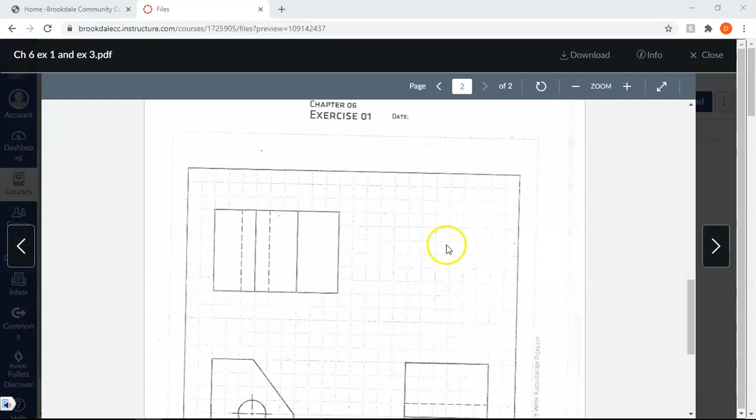We are given the orthographic views of this, meaning we are given the front, the top, and the side view. Your direction is to create the 3D part in Inventor and then create the drawing file to properly dimension it. As a side note, the grid spacing on the bottom is 0.2 inches, meaning that each one of these is 0.2 inches.

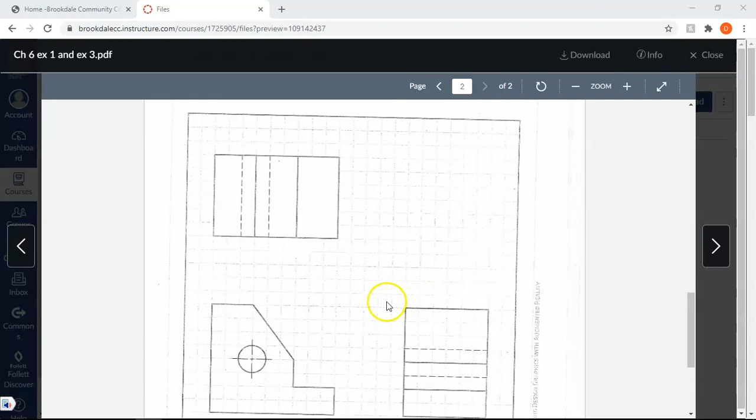For simplicity's sake, let's just say that each grid is 1 inch. This is the front view right here, which is a good place to start by drawing it. I'm going to draw as my sketch 1 this shape right here, and then I'm going to extrude it the depth involved, which is going to be shown from either the top view or the side view. Either way, the depth extrusion is going to be 6 units.

So we can do a little bit of counting beforehand. We go up 1, 2, 3, 4, 5, 6, up 8, over 3, over 9, up 2, and 3, up 2. We'll see if we can remember that as we draw it.

So we're going to come over here, do a new English part, start a sketch. I'm also using Inventor 2018. It's 99.9% the same as 2020. If for some reason you have an issue finding the button that I use on your version, let me know and I can let you know where you can find it.

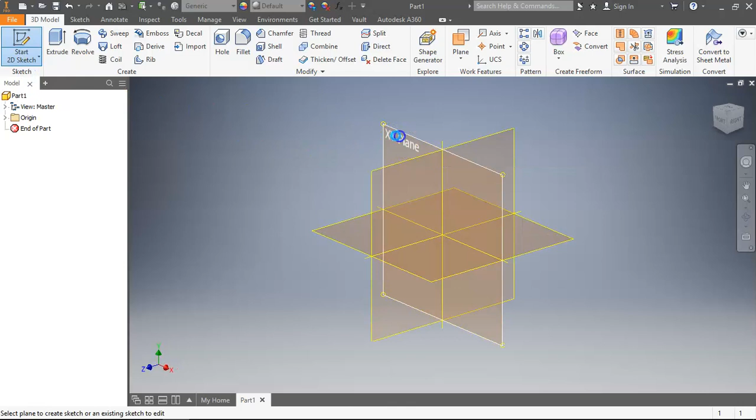So we're going to start a 2D sketch. I like to do the XY plane. I'm going to start at the origin, make sure that the green dot is there. You can zoom out a bit and then hit the middle scroll wheel to pan. It's good to kind of be able to see the line in its entirety. Now it's a little bit too far out.

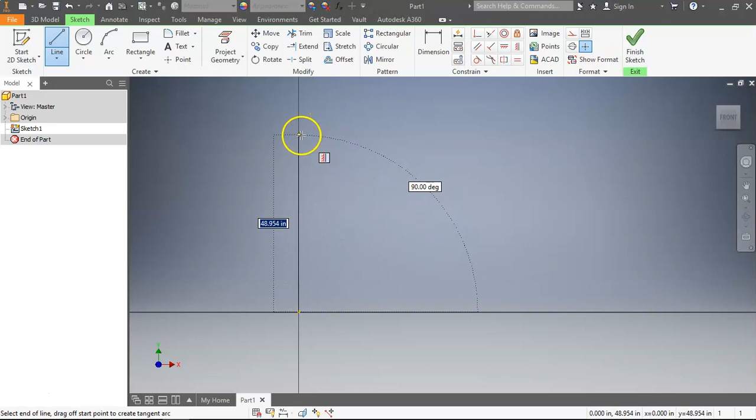You're going to have your first one be 8 going up, and then you're going to move over 3. And you're going down kind of an unknown amount, right? So you can either just draw it somewhat in and add dimensions later, or you can hit escape, go back into the line command, and then start going in the other direction. So that's 9 in this direction, always making sure that you are perfectly vertical and perfectly horizontal.

The way you can check is as I get close to the line, you'll see me click on it, and then you'll have that little constraint bar show up, showing you that it's perfectly 0 degrees, perfectly on the x-axis, perfectly horizontal. I'm going to say 9, enter, up 2, over 3, up 2, and then I could connect the dots. I can hit escape now, and notice how when you hit escape, you'll get out of the line command.

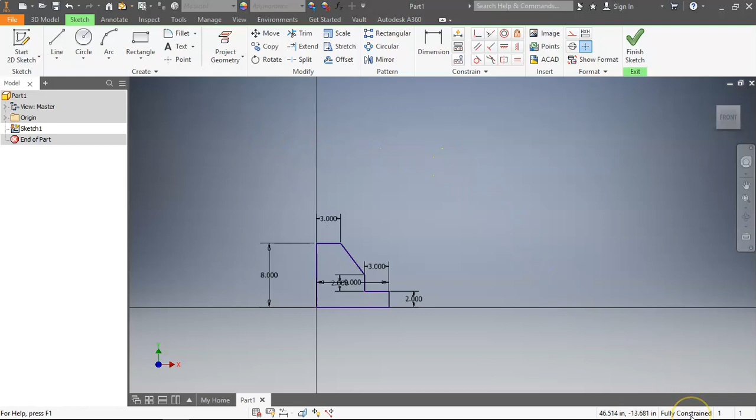Okay, so we are fully constrained. That is a good way to kind of spot check yourself.

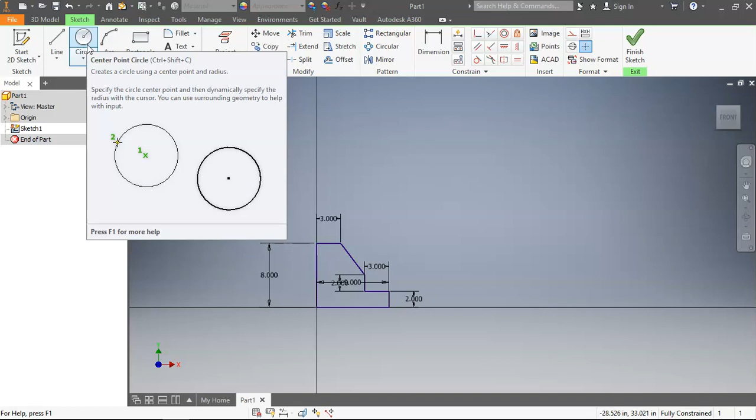And now I'm going to add a circle. Circles require 3 dimensions in order to be able to locate and describe the circle. You need 3 dimensions for each circle. The first dimension tells you the diameter, and the next 2 dimensions locate it both horizontally and vertically. I'm going to just put a circle, and I'm not going to specify the dimension yet to prove a point. I'm going to put it out here and hit escape, and look, 3 dimensions needed. So we went from fully constrained to needing 3 dimensions because each circle requires 3 dimensions to properly describe it.

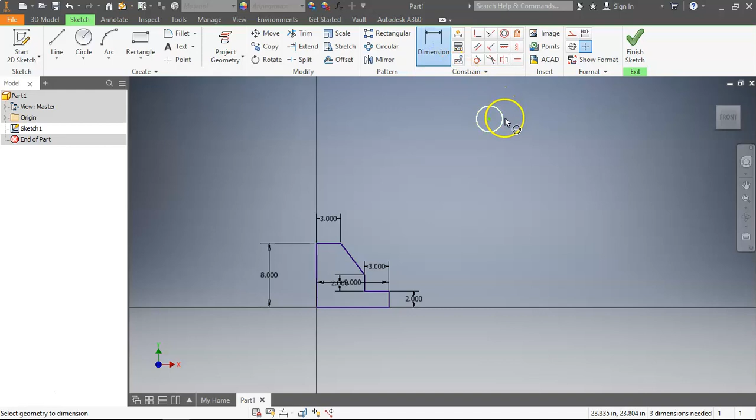I'm going to hit dimension, and I'm going to click on the circumference of it, pull it out, and tell you I want this to be a diameter of 2. Boom. Now we have 2 dimensions needed.

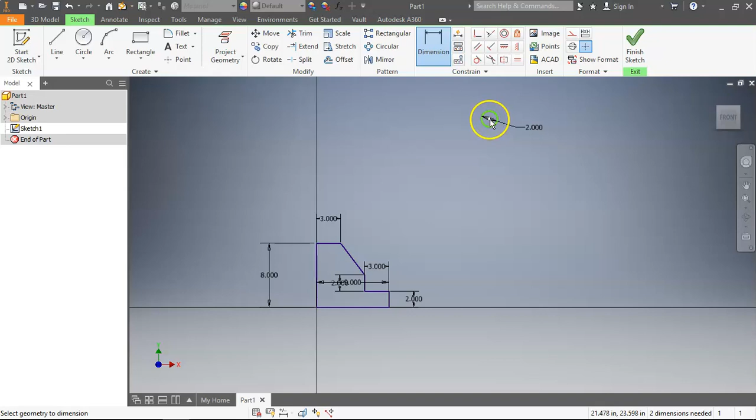And now I'm going to click on it, and I'm going to locate this circle via the center point. So I'm going to say center to the origin, and then you can either do a vertical or a horizontal dimension. You're going to have to do both, so it does not matter the order. We'll do a vertical first. I want the vertical dimension between the origin and the center of this circle to be, what is that? 1, 2, 3, 4. To be 4 units.

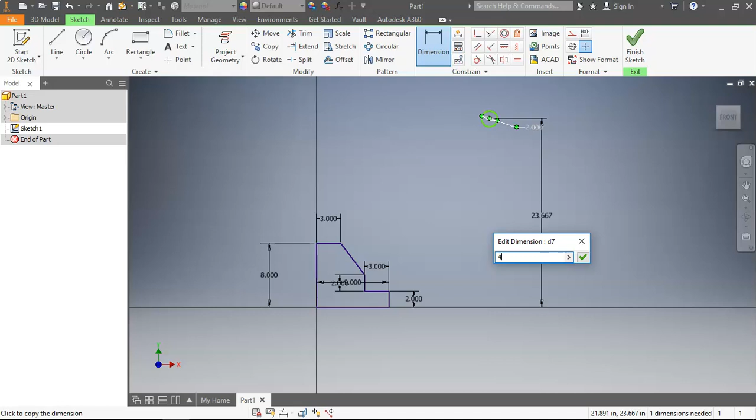And now it's on the right vertical plane, but not the right horizontal. So you're going to have to do the same thing again, dimension, click the origin.

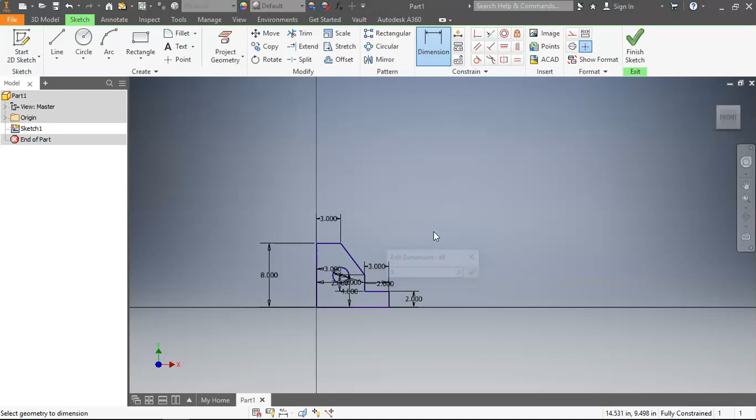Make sure you're getting the origin, right? I guess sometimes these lines will work, but I think it's good practice to use the origin. Now the horizontal distance is going to be 3, and now we can see we are fully constrained.

You can finish the sketch, extrude it. It might not give you a preview because it doesn't know which closed geometric shape it wants to extrude. So just click right here and specify you want to extrude it 6 units.

And that's it for this drawing—well, this part drawing, I should say. This is one way of drawing this part. There are easily a dozen ways you could have approached it using different sketches, different orientations. As long as it's a somewhat efficient drawing and you get the same finished product in the end, then you meet the requirements. You don't necessarily have to do it the way I did, or in the most efficient way, as long as you have a finished product.

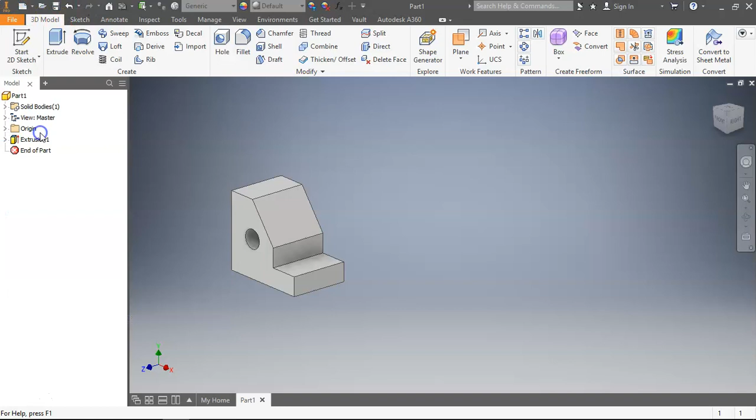That is good. So now we're going to have to save it, because in order to do a drawing file, we need to have a part file that we can reference into it. So I'm just going to save this on my desktop.

Or actually, I have a folder for Brookdale Community College, and we'll call this week—which week are we in? I forget. 3, or maybe it was 2. No, I think it's 3.

And this is chapter 6, exercise 1. And it's gonna really help to have it be organized, or else you could save it in the wrong spot, and then you have what they call unresolved links, where it's trying to pull a file that's not saved in where it was previously, and then you might lose some work.

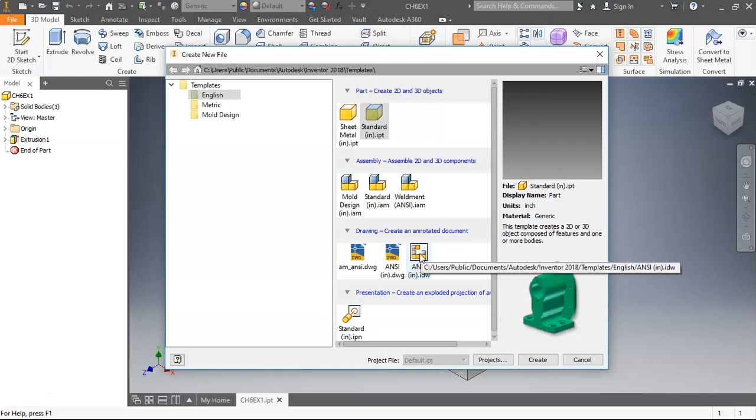So now that we have the part file saved, we are ready to create a drawing file. So we're going to go back to New, Drawing, ANSI, which is American National Standards Institute, something like that. IDW, Inventor Drawing.

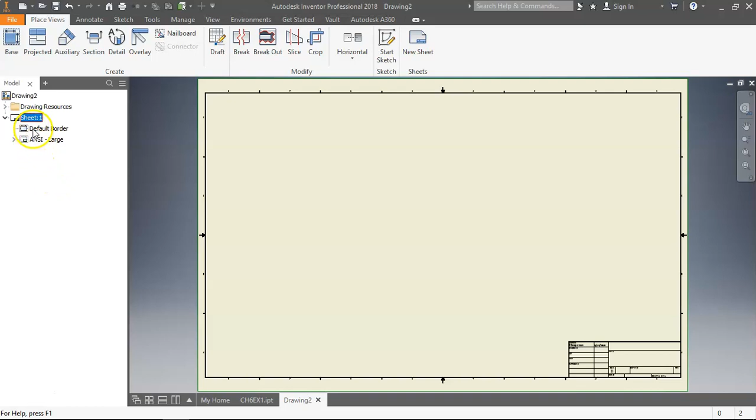We need to then, for every one of these, adjust the sheet specifications. The default is a 22 by 34 inch sheet, which is very large. For this class, we want it to be an 8.5 by 11. So you're going to right-click Sheet 1, edit the sheet, and make it a size A, not a size D. 8.5 by 11, okay. It makes the title block huge.

Let's delete the title block. And then we're going to go to Drawing Resources, Title Blocks, and ANSI A is a smaller one. Let's insert that. Right-click it, and then hit Insert.

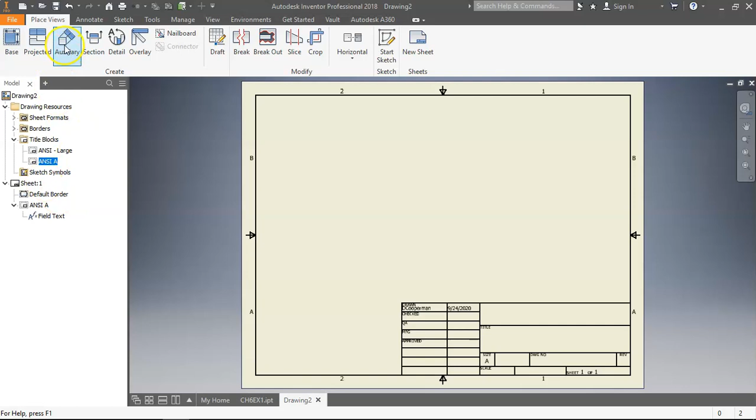Now we are ready to import our part file. So under Place Views, you're going to hit Base. Inventor says, okay, he probably wants this part because that was the other drawing I have, or the other part I have open, and it's the one I saved most recently.

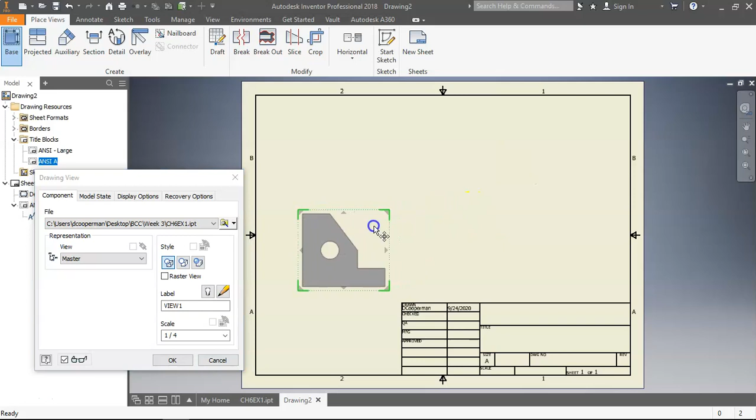If for whatever reason it did not give you that one, you can just as easily go to Open an Existing File and find wherever you saved it. So let's go from the top. Base, I'm going to move this over by clicking in the green area, and then before I click anything else, I'm going to move my mouse up.

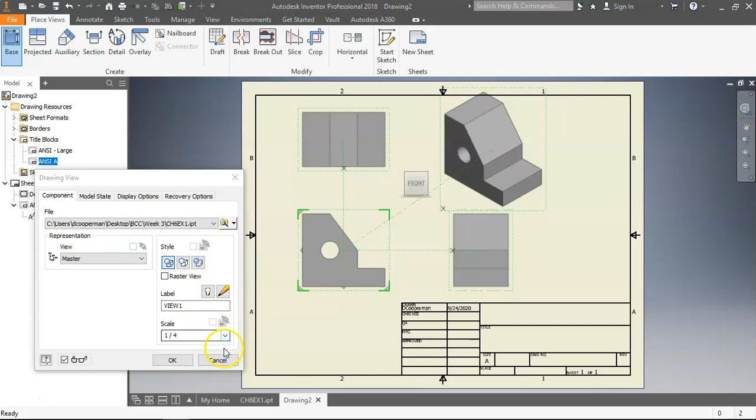And look, I could just as easily place my top and my right view. You can even, if you wanted, put in isometric as well. And then you can hit OK, or you can adjust a few settings. Hidden line should be on. Hidden line removed for whatever reason if you wanted that. And then shaded also gives you some color. You can also adjust the scale as well, and you can hit OK.

If you wanted to delete this, you can click on it and hit delete. I'll show you something else as well while we're here. Say you only included the base view, and then you want to include the top or side view later, you can go to Projected, and then look in the bottom left.

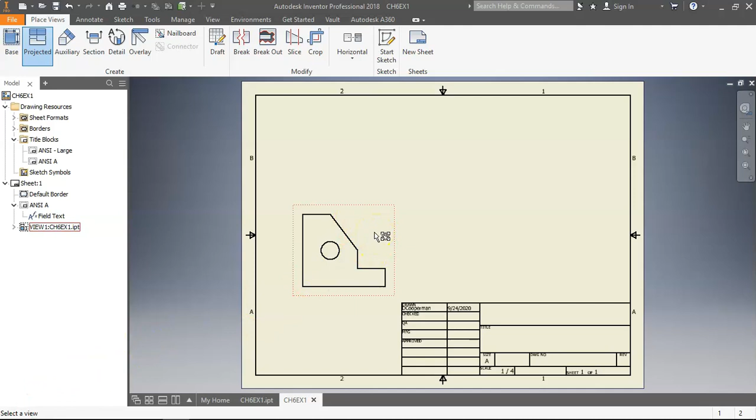In the bottom left is Inventor telling you what it wants from you. So if I want to do Projected, but I need to kind of learn the steps in order to do that, you can do, okay, select a view. Well, I want to project this view. Select. Select view location. Okay, I want to locate it right here. Select view location or choose create.

Well, I want to do another view location. Now I want to create it. So I have to do the right-click menu, create. And now it's good.

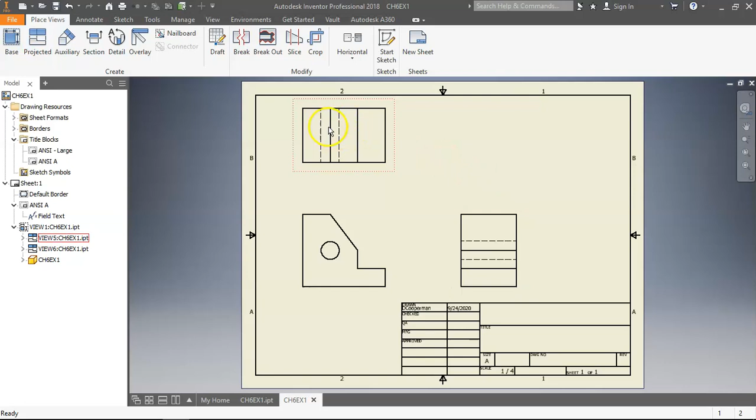Notice how this automatically includes all my object lines and all my hidden lines. Hidden lines, of course, are represented by dashed lines.

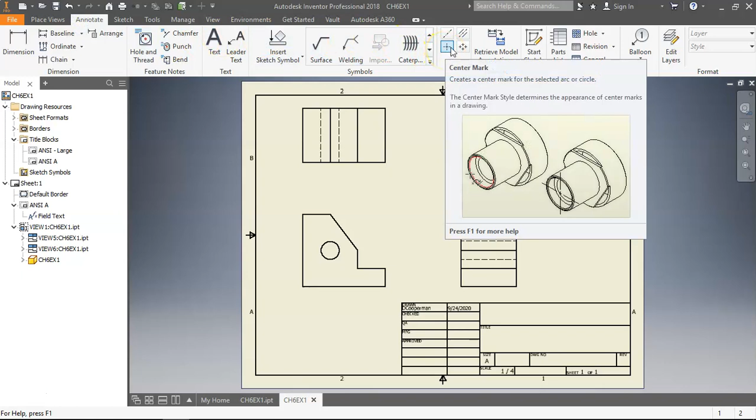Next, you are going to want to include center marks and center lines. So you're going to go to Annotate. Center marks are like the little crosshairs, a target or a scope. You just click that, then click the circle, and it automatically appears.

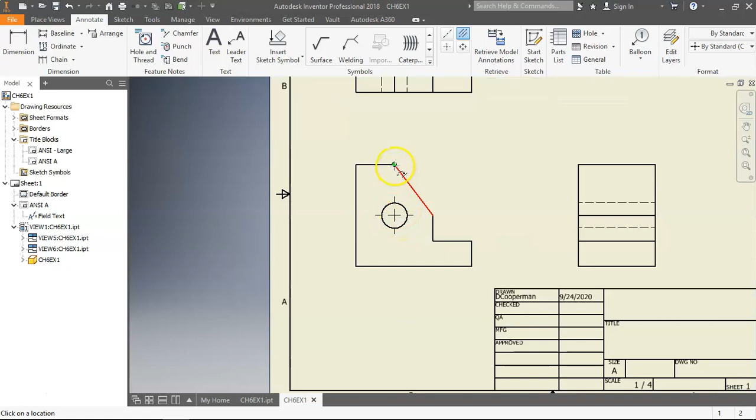For center lines, you're going to click center line bisector. But notice something: the center line of this hole occurs at the same location as an object line. The halfway point between these two hidden lines is right here. Order of operations states that if I have an object line and a center line at the same instance, I'm going to show the object line instead. So I'm not actually going to add a center line here, and the same for here.

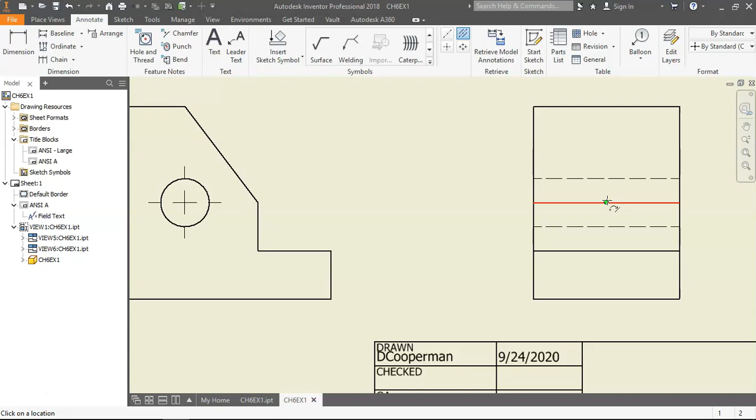If the circle was moved over, let me just show you. Now this is just a hypothetical, don't get confused, don't change yours. Let's say this was moved over, for example. Let me move it a little bit so it's not directly on the edge. So, 1.25.

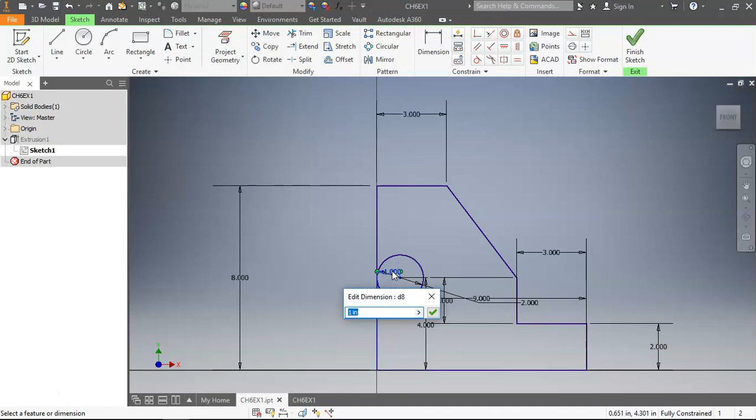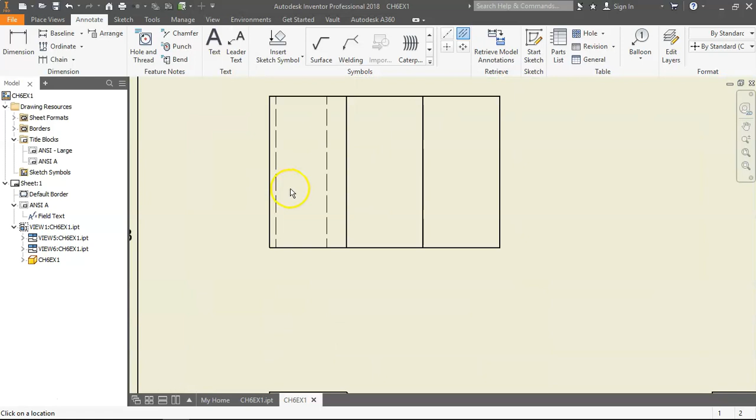Notice how it changes automatically over here. Now I would require a center line over here, since this hole is actually a circle. So you're going to hit center line bisector. If you don't know how to use it, look on the bottom left. Click on a location — the center line is going to be between what two lines? Here, click, and here, click. Boom, it automatically populates. Of course, I don't want that, so let's go back and undo some of the changes we made.

And we will resume. We have the center mark and no center lines, because the center line occurs where a hidden line appears.

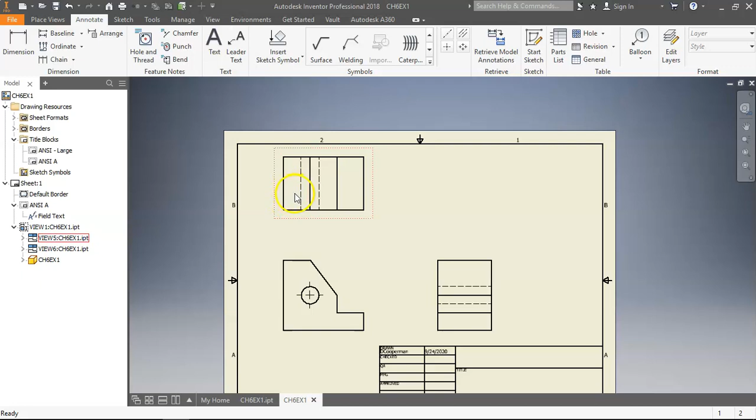Okay, now we are ready for some dimensions. We went over all the rules for dimensioning last class, and there are a bunch of them, so you've got to try your best to remember them. Sometimes you have to break one rule to make the object look better, or to avoid violating another rule. But at the end of the day, you want a part that's properly dimensioned and looks good and neat. So I'm going to do dimension and start dimensioning things.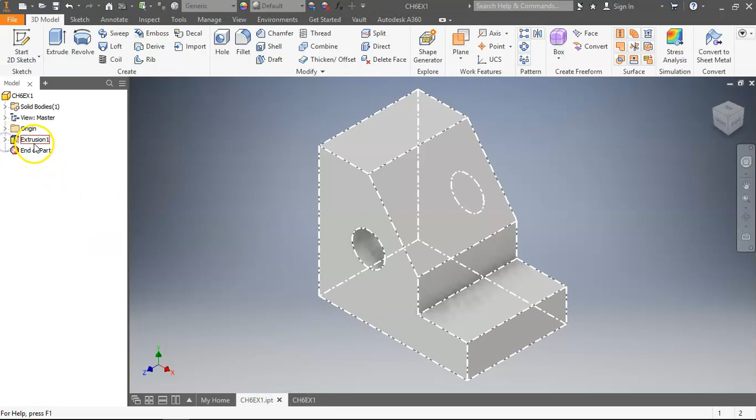If you go back to your sketch, let's edit the sketch for a second. You can either edit the sketch by right-clicking and going to edit sketch, or you could expand this to find your Sketch 1 and do it there. Here are all your dimensions.

So I have a 2 right here, a 4 right here, and an 8. Those are all my height dimensions. So we can go ahead.

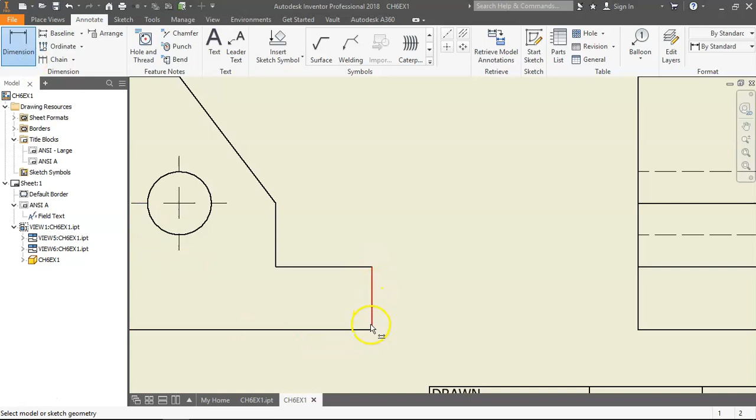Now to dimension, you can either click on the line when it's red, or click when it's a green dot, and that gives you point A to point B. You will most definitely be using both. Let's do this, and then you also want to dimension this line.

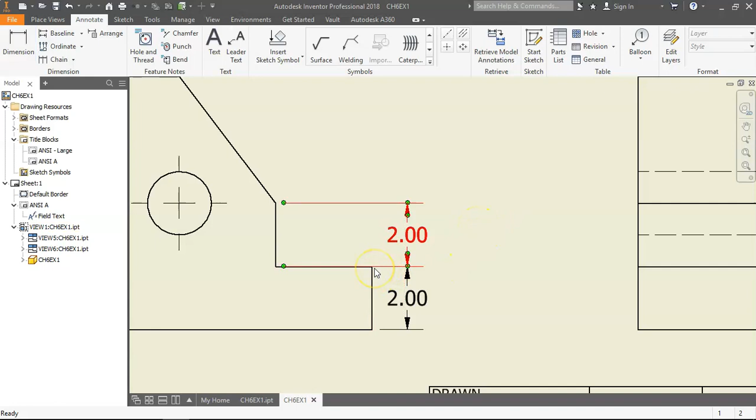Now, if I just click on it, that looks pretty good, right? It's actually a mistake right here. Remember, you always want to have a gap between the point you are dimensioning so it doesn't get confused with the object line. So I'm going to delete that last one and show you what you should have done.

Remember, last time I did this, I clicked on the line, and that was bad. This time, I'm going to choose point A right here, and point B not here, but rather here, because that gives me the vertical distance in between — but by choosing this point, the gap will now be visible. Boom.

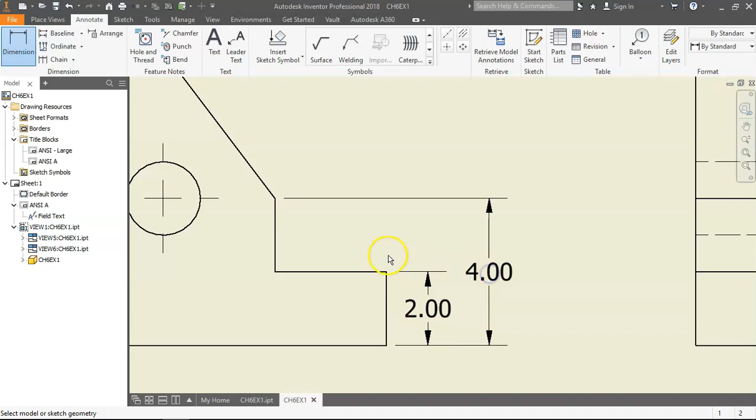Another thing you could have done — this is perfectly valid too — is go from here to here. We talked in class about baseline views versus chain views. This would be a baseline view, and the previous one would be a chain view. Both are perfectly valid.

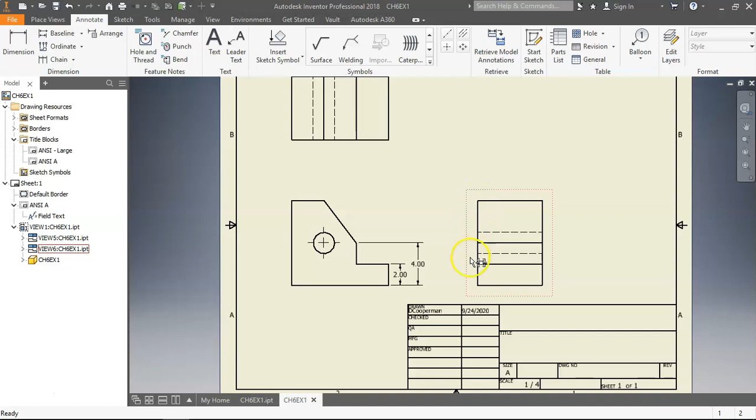For the overall height, you might be tempted to do this, but one of the rules says you should always keep the dimensions between the views whenever possible. You could go from here to here, or it's equally valid to go — notice how you can't even do the line — from here to here. Either way does not matter; both would be valid. I like to do as many dimensions as I possibly can on my front view.

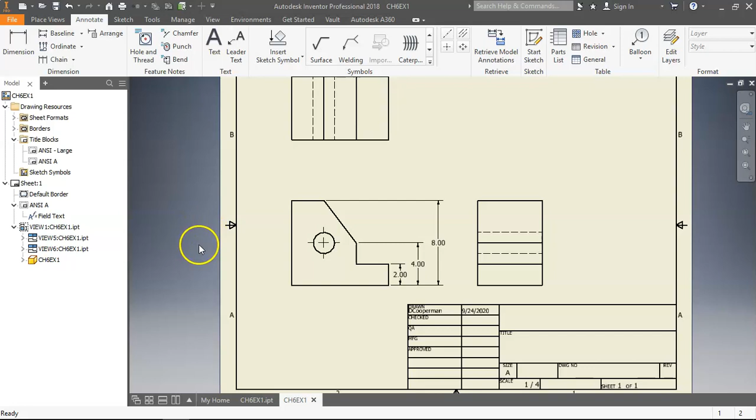Okay, so we will continue. I need to do a few width views. So we did my height views, and I gotta do some width views. The width views tell me that I have 3 and 3 and an overall width of 9.

So you could do the width from here to here and then pull it up. I'm going to go on the top. I think it'll make it look a little bit cleaner.

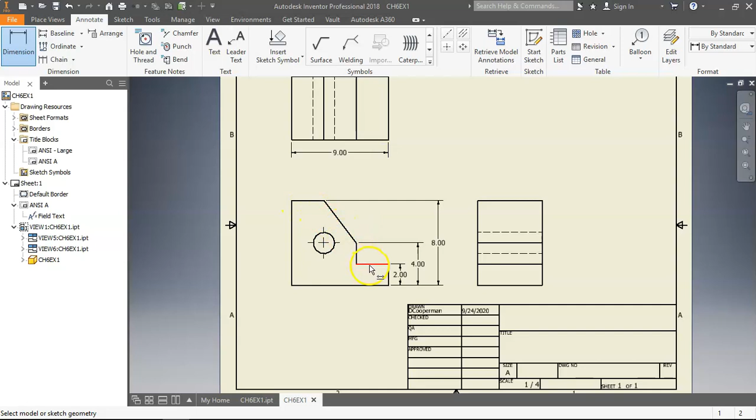And then this one, where should we put this one? You could do it like that. That's valid. You could also go from here to here and pull it out of the way as well. A little congested. I'm okay with either.

Even like over here I'd be okay with. I just want it looking good. Little messy, but okay.

So there is a mistake in this drawing, and I'm going to leave it until the very end to show you.

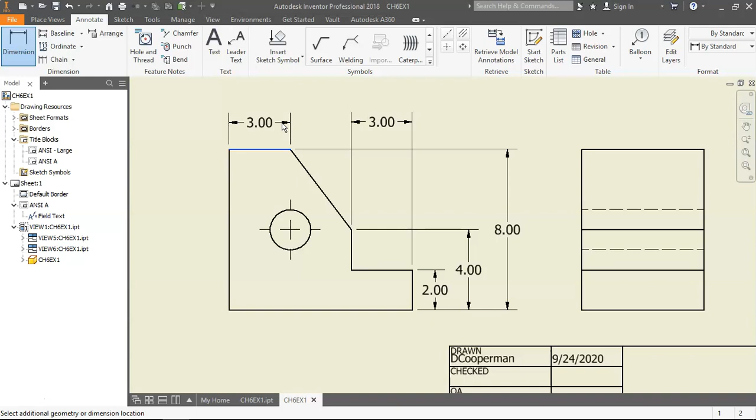It's also good practice to keep dimensions lined up whenever possible. So right here is kind of in line with that. It's better to have that than this be way out here. You want it to look nice and lined up.

You can almost count out the dimensions, right? We have 1, 2, 3, 4, 5, 6. I need my depth ones. So depth can either be here or here. And then I have to do this.

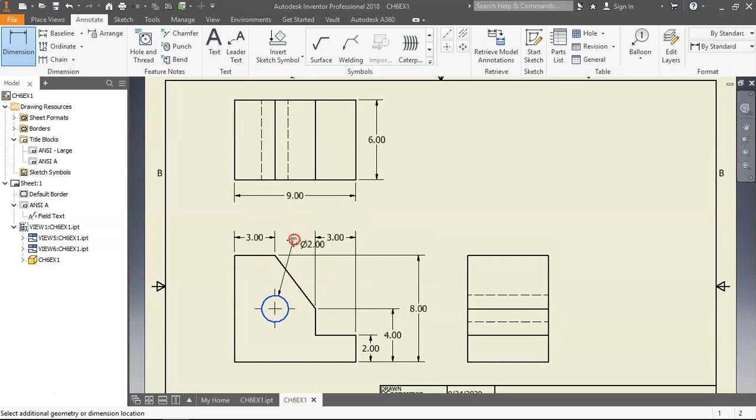So in order to dimension a circle, all you have to do is just click on the red line and pull it out so that you can see it clearly. You definitely do not want to do something like that. See how it cuts it off?

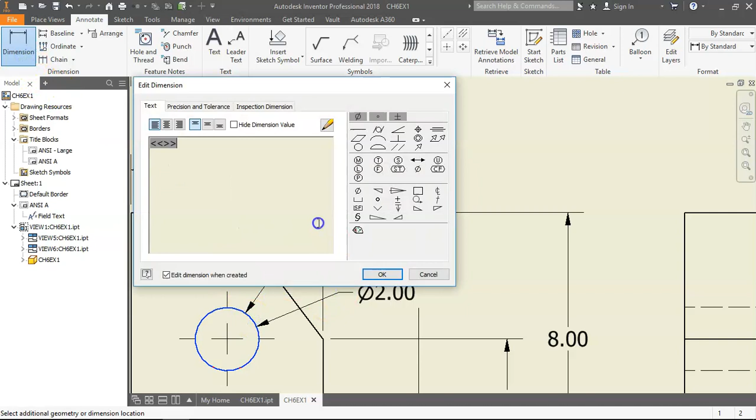I don't like that. If by chance you're getting this dialog box every single time you do something, uncheck it right here. It says edit dimension when created. If you get this, that's annoying, right? No, I don't want to edit the dimension every time I create one. So uncheck it.

Okay, hit escape when in doubt, and let's now re-include that. Find a good space where it's not confusing.

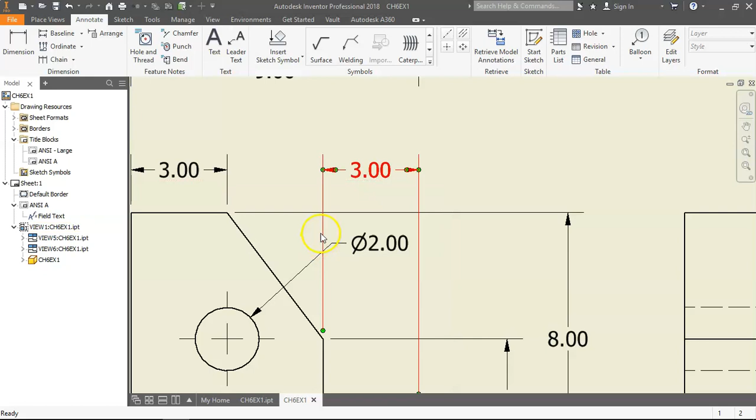Are we done? A way to ask yourself if you're done is to kind of reverse engineer it, right? You can say to yourself, if I printed this out and handed it to somebody else, can they draw it?

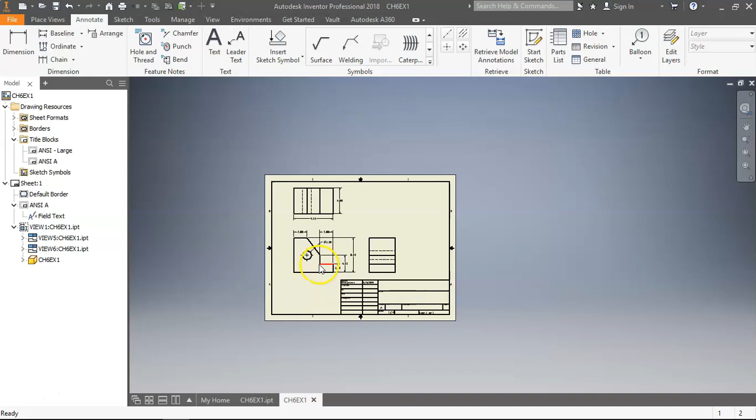Well, let's try it. I start here, and can I draw this shape? I know I'm going over 9, up 2, over 3, up 2 because 4 minus 2 is 2. Oh, gotta pause right here, so I'm up there. Let's go back to the beginning. Up 8, over 3, connect the dots, boom.

Now I have this circle. I know the diameter is 2, but do I know where it's located? You might be able to realize, okay, that looks like it's right there. But in the engineering world, you can't make that assumption.

So the reason why this drawing is incomplete is I actually did not locate this circle. Remember, you need 2 dimensions to locate a circle. So I'm actually going to delete these 2 dimensions.

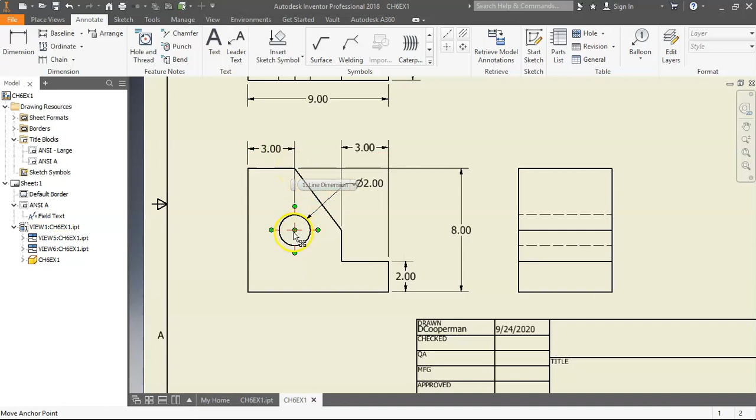And instead, here's what I'm going to do. I'm going to say from here, point A, but not here as point B, but rather right here. And what that does for me is it's actually killing 2 birds with 1 stone. It's telling me the distance from here to here, as well as helping you locate the location of this circle.

You might be tempted to say, oh look, there's no gap right here. You said that you can't have that. Well, this is kind of like an exception to that. The gap is really located from this center mark right there.

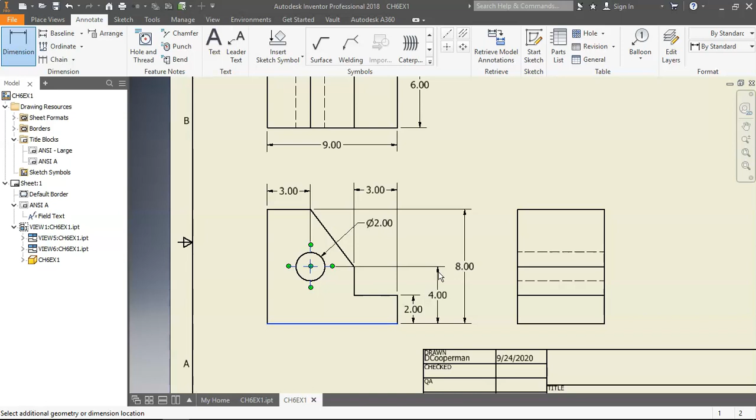And we'll do the same thing as well. Point A, this baseline, and point B is right here. Sometimes you'll notice that it'll give you a preview. A lot of times that's a good location for it, but you don't have to use that preview. And hit escape. Okay, we're done.

Once you are finished, and again guys, full transparency, this is your answer key right here. This is how you can see if it's working or not. This is what I'm grading you against.

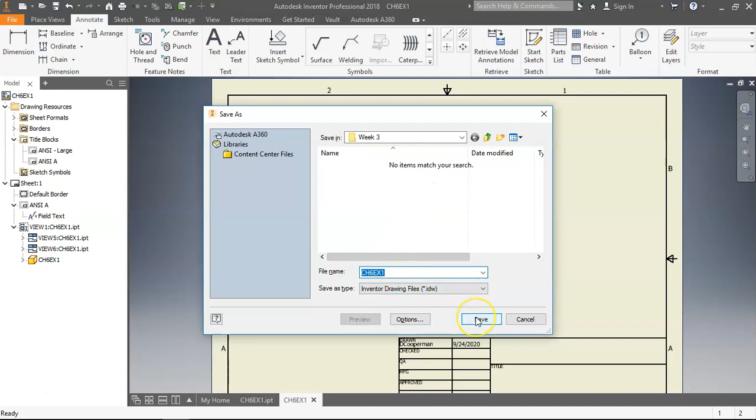So once you have this done, I would do a Control S to save it. Call it the same thing, Chapter 6, Exercise 1. You can name it the same thing because it's a different extension.

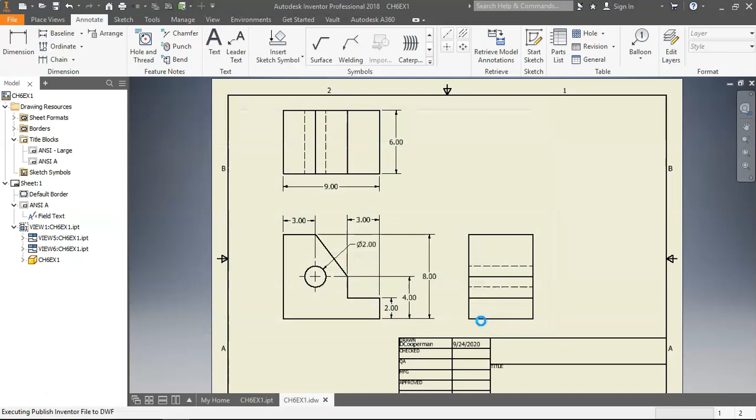And then I want you to create a PDF and upload the PDF. So File, Export, PDF, and name it the same thing. Boom. And that is what you will be turning in. That concludes Chapter 6, Exercise 1.